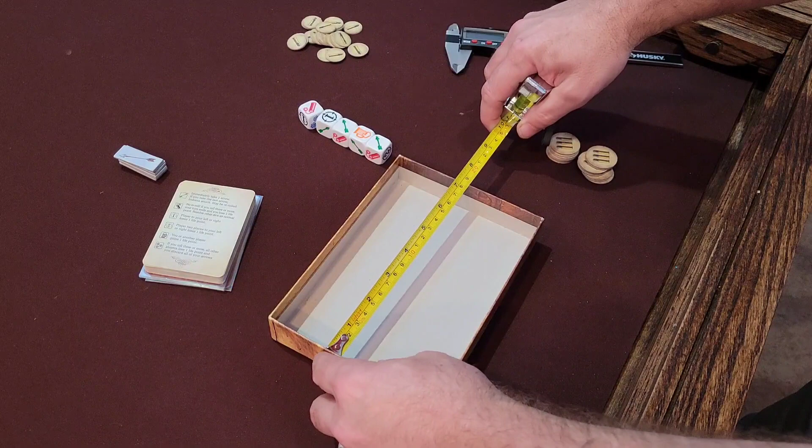So that length is 182 millimeters. I write these things down, and I've already done this. So it's 182 millimeters, and I'd get my width, which is 130 millimeters wide. Honestly, I think it's a little short, maybe 129. I usually err a little on the smaller side, so I might go 128 millimeters on that measurement.

The next thing I do is measure the different components, so I would measure the cards. Let me zero that out. The cards are, kind of a weird angle here with the camera, 66 is what we've got there. And then we've got 93, I think I went to 94 though. And then I'll get the other dimension here, which is 13 or so, 12.6, I think I went to 13. But anyway, so I've got those measurements.

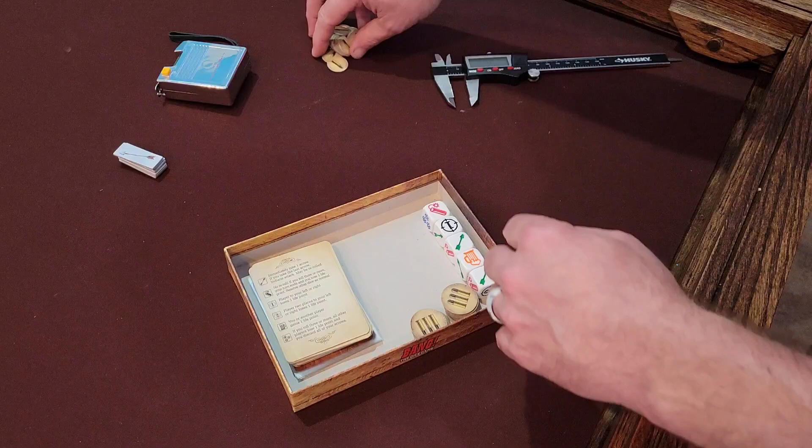Then what I'll do is figure out the orientation I want the components in the box. So I put the cards like that, and I want the dice down here. I know I want to create a little more space if I were to buy the expansion for this game, so these components might be over here. Okay, the other tokens, let's see. You have to just kind of get an approximation of how you might want these to fit in the box.

There's some trial and error for sure when you're doing something like this. I created one for Raiders of Scythia, and when I made it, I almost had it exact, but it wasn't, so I ended up having to modify it and change some things. So the components might fit something like this.

So what I'll do is measure the cards, measure the box. I might also have an insert right here with maybe 3 different pieces, and then I would measure the dice, and write all that down. Then I would put all this into Fusion 360, which would be the next step, to create a physical box in Fusion 360 as well as these components so that I can create an insert. And then from Fusion 360, put it into Lightburn, which would allow me to laser cut the insert. So we'll do that.

Okay, so I'm going to make an insert for Bang the Dice Game, and I'm using Fusion 360. There's a free version available. The very first thing I'm going to do is select Create Sketch. Then you have these different planes you can select, so it doesn't really matter. I'll select that one, it's the top plane looking down.

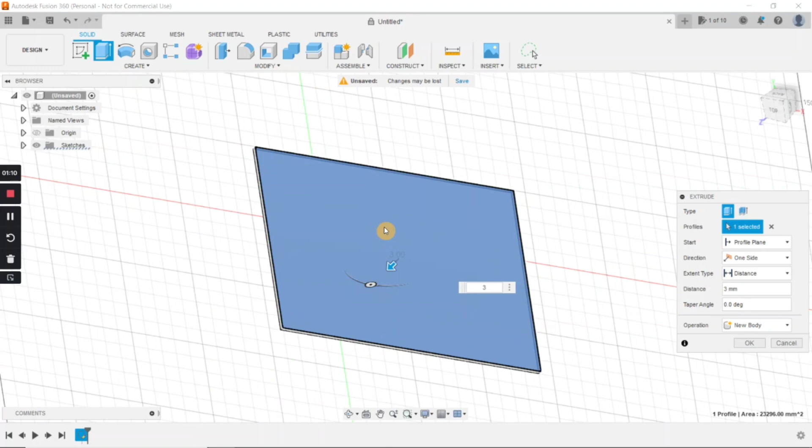Then we'll extrude the sketch, which is what makes it three-dimensional. I know that my box material is 3 millimeters wide, so I'll hit 3 millimeters. If you come over here and select New Component, that's what we want to do, hit OK. So now you can see, if I go over here and hit Home, there's the bottom of my box.

Now to create a side of the box, the way I'm moving this around is hitting Shift and pushing your mouse wheel, which allows you to move the camera view. So now Create Sketch, we're going to create it on this plane, and now I'm going to create another rectangle. We're just going to start it on this corner.

I don't care about that, all I care about is the inside box dimensions. I know my box is 182, then hit Tab, and the walls are 30 millimeters tall on the box, so I'll hit Enter.

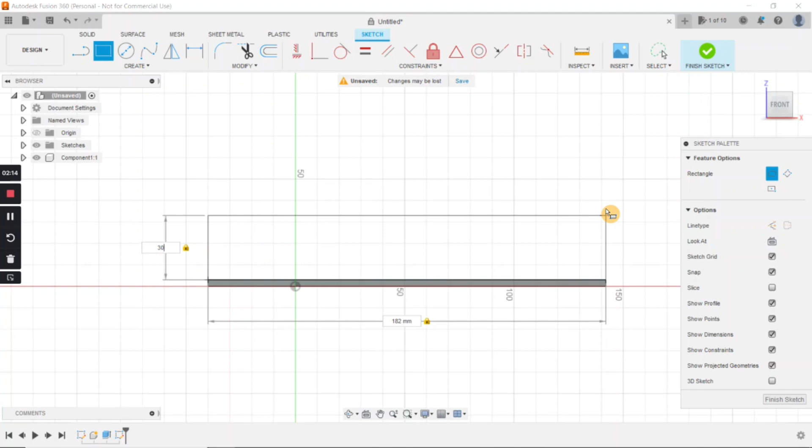Now we'll extrude that. Click extrude... oh wait, sorry, not extrude. You have to escape to get out of that. We have to finish the sketch first.

So finish sketch, then extrude. Select our face to extrude. We'll come over here and click new body, and set it to 3 millimeters. Hit enter. So there. I realize it doesn't go all the way to the bottom, but I don't care. I'm just looking at the inside dimension.

We forgot to select a new body or new component, but that's okay because every time you make something, you create a sketch and a body. You can scroll over that, and what we'll do is right click, create component, and now we have those. So let's rename these.

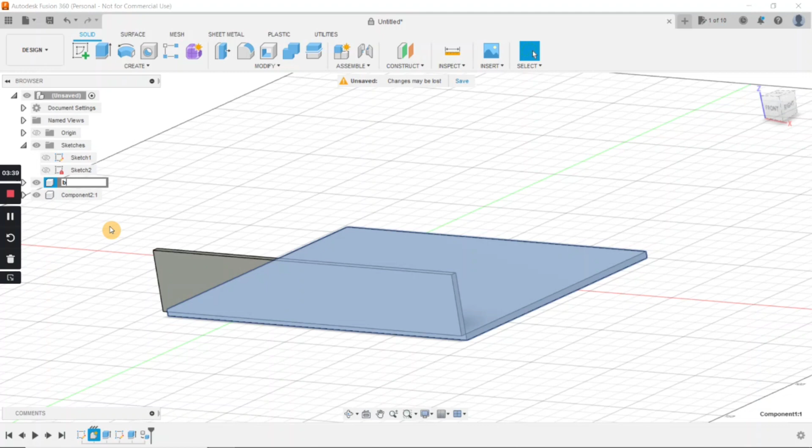Component 1 we'll rename to box bottom. Component 2 we'll rename to box side. And so now we want to make another side.

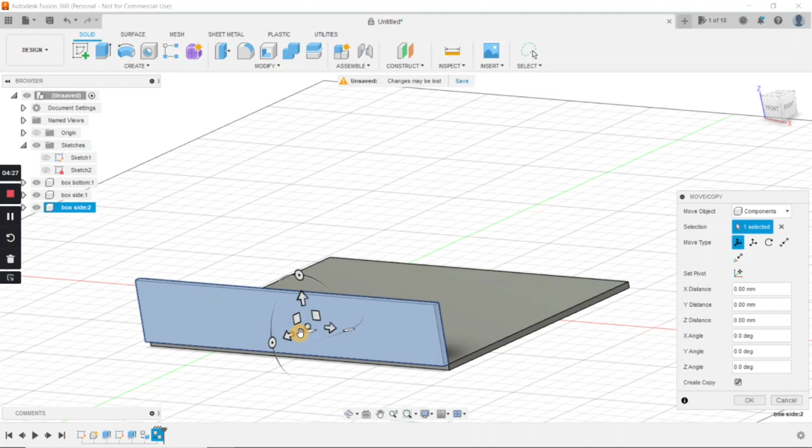An easier way to do this is we'll right click our component and go to move. You can also just hit the hotkey M for move, which is a lot easier. Now we don't want to select a face, we want to select a component, which is what we created. So we'll select this component and create copy, and simply slide this to the other side. Hit enter. You can see it created another component for us.

So we got 3 components there. Now we're going to create another, like the back of the box. Create sketch, and we'll create it off of this plane here, with a rectangle. Again, I only care about the inside dimensions of it. So there we go. And now finish sketch.

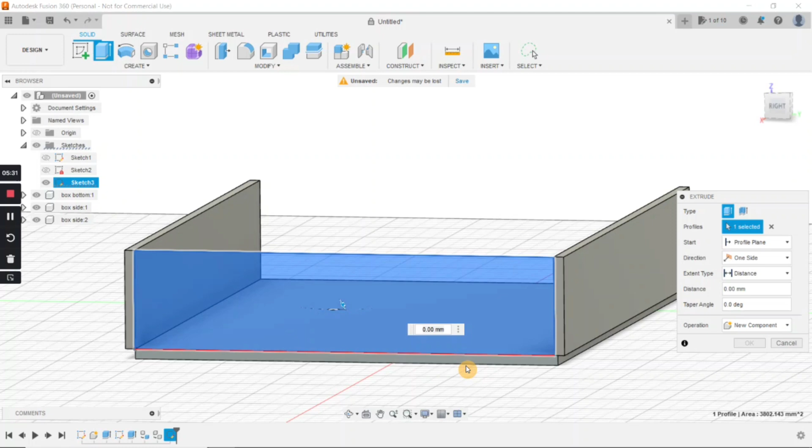And extrude. So click this, and I kind of like looking at it from a 3-dimensional view. Again, we're going to select new component, 3 millimeters, and enter. We'll rename that component box back. Okay, so we got all that squared away.

It's easier, in making these, I found it's just easier to deal with components rather than bodies when moving things around. Now, I'm not going to create another box side because we're going to use this as a reference in sliding our components in and out. It's just a little easier, I thought. You can create another side if you'd like.

So the next thing I'm going to create is the deck box that will go in here to hold the cards. Now we're going to create the deck box. One thing I like to do is create the size of the cards. So what I'll do is create a sketch, and we'll do it on this plane here.

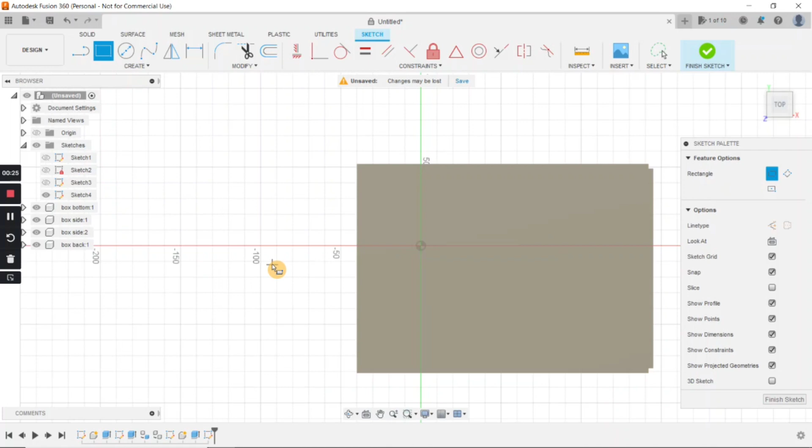I'm going to create a rectangle, and I've already measured out the cards. The size of the cards are 94, and these are sleeved, by 67.

And I'll hit enter. Now we will finish the sketch and extrude the cards to the correct size. I know that the cards are roughly 15 millimeters. And again, I forgot to create a component.

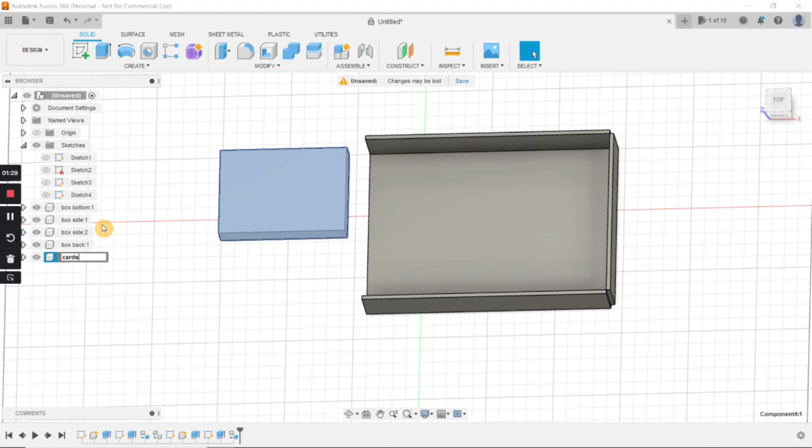So let's go over here to this body and create a component. So here's our component. We'll rename that cards. So that's the size of the cards.

Now we're going to create a deck box around these cards. So what we can do is go to the underside of the cards. We're looking at it from underneath. We're going to create a sketch underneath here. Now I'm just estimating the size. I know I've got plenty of room in the box. If it was tighter, I'd have to really measure it.

So let's just go there. So we got plenty of room for our deck of cards. You know what, let's make it a little bigger. I know. Okay, that looks pretty good. All right, so this is the bottom of our deck of cards.

Now what we're going to do is this is going to be finger jointed because we're going to cut it on a laser cutter. So what we're going to do is create finger joints. Go to a corner - this is our first finger joint. It needs to be 3 millimeters because that's the width of our material. Tab, and for this finger let's just make it 10 millimeters. It's kind of your choice.

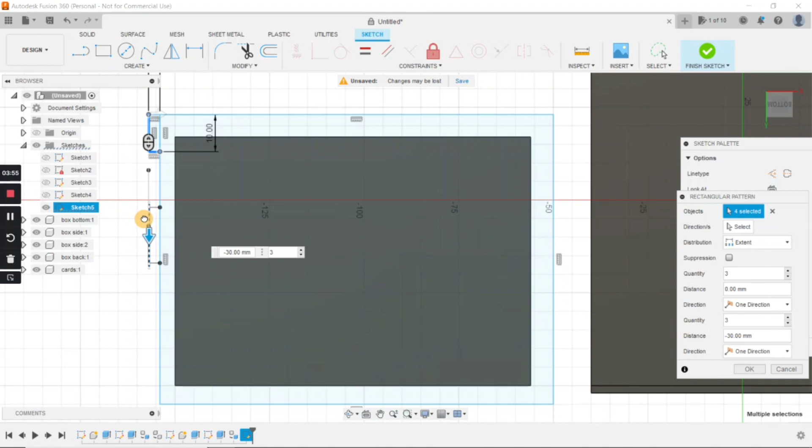Then what we can do is go to create rectangular pattern, and we're going to select all 3 faces here - you don't have to hit shift or anything. Now we're going to drag it down. Oh, I missed one of my faces. Watch this.

There we go, look at that, it added it. Okay, we're going to drag this down to here, and we want it to go to the end. The more you scroll in, the more accurate you can be. Now we want 4 finger joints, and enter. So you can see we have our 4 finger joints.

Now what we can do is the same thing to the other side, but there's a little shortcut. If you select the line tool, we'll find the midpoint. You know the midpoint because see the triangle pop up? That's the midpoint, and this is a reference line, okay, is what it is.

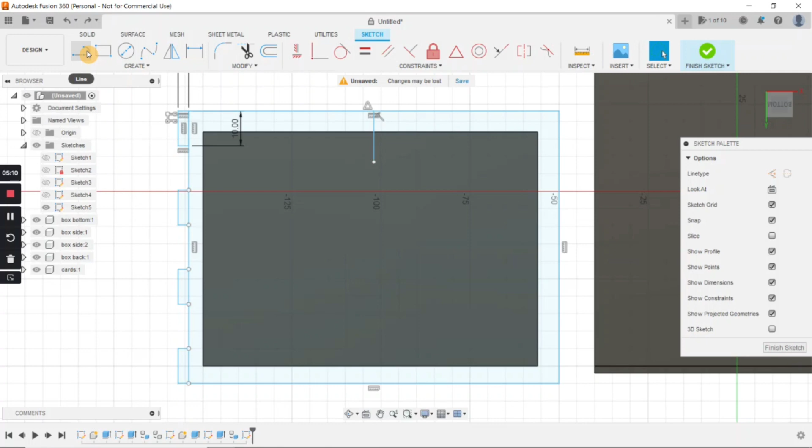So you have to hit escape to get out of that, and we're going to put another reference line here. See the triangle? We know that's the middle. Reference line, that is angled. So Control Z, line tool. There we go. Now what we can do is click mirror.

We're going to select—oh, I don't like that select tool. Let's go to the window selection. Okay, and we're going to select all of these. And it still didn't get everything. That's okay, you can go one by one, not a big deal.

I am not an expert at Fusion 360 by any means, and I'm sure there's easier ways to do all of this. So okay, we've got the selection. Now we click mirror line, and we mirror this line, and pow, they just pop up on the other side, and click enter. So there we go.

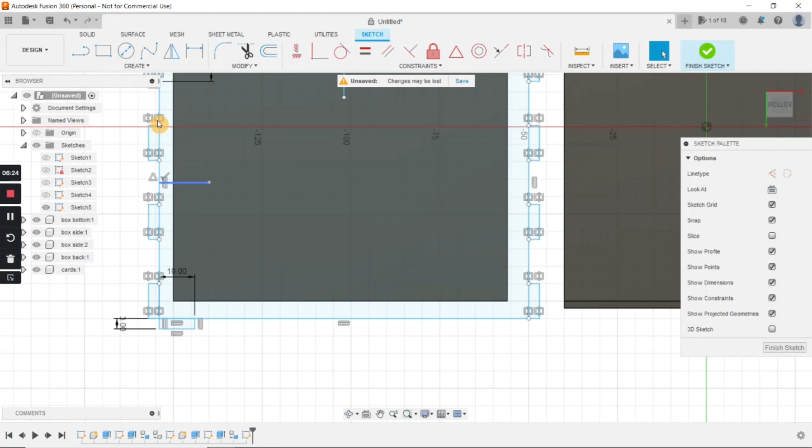Now we do the same thing to the other side. Finger joint, so let's do 10 millimeters that way again. Tab, 3 millimeters, enter. Rectangular pattern. Select all 3 faces, and then we will drag it out that way. And we want 4 tabs. Enter. And then we're going to do the same mirror trick for the other side.

So click mirror. Can never get it to select everything—I don't know what I'm doing wrong. It's okay. There we go. Mirror line, select, and we'll mirror across this line. There they are, and enter.

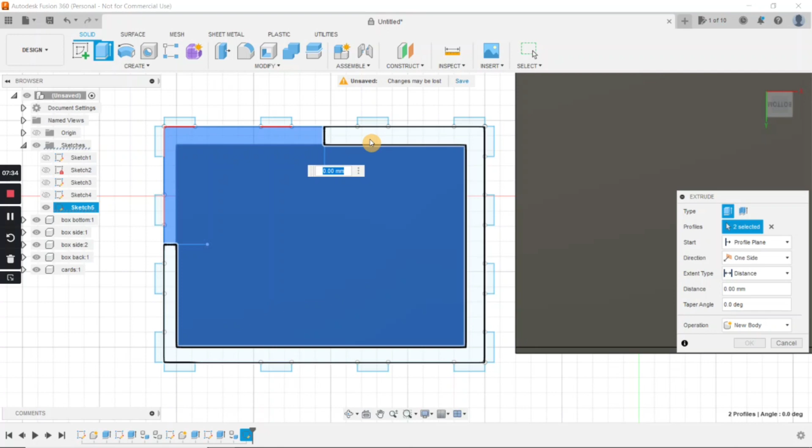So now what we can do is finish this whole sketch out. So we'll click Finish Sketch, and now we're going to extrude, so we're going to make that whole piece 3-dimensional, and you have to click everything. For whatever reason these lines kind of separated out, that's okay. And then click your tabs.

Okay, and now I'm going to look at it from a 3-dimensional aspect. Now, our material width is 3 millimeters because that's the wood I'm using—the wood is 3 millimeters wide. So what we want to do is again create a new component, enter, and let's look at it. Let's go home, and you can see what the bottom of our card holder looks like. We're going to rename that. Card insert bottom, okay.

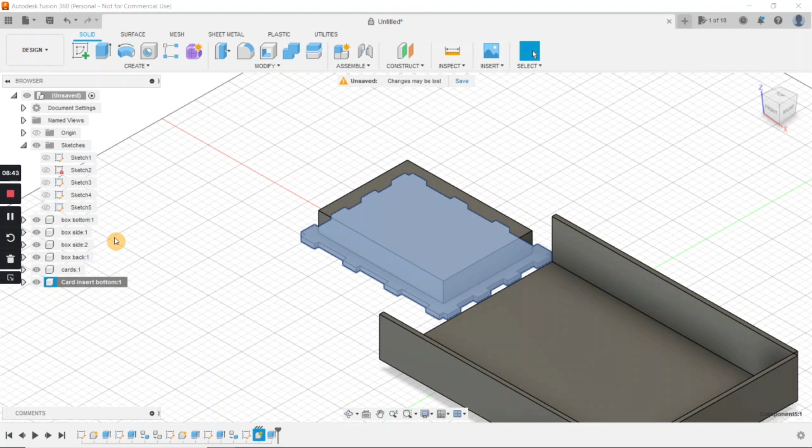And now we're going to create the sides for it. The way we'll do that is, let's bring it over here, and create sketch. We're going to create it on this back part, okay, on the side. And rectangle, and we'll go all the way here. Let's minimize that, we can see a little better. And so the height—well, the width's going to be all the way down here, okay.

110, we're going to tab, and the height—the inside diameter or the inside height of the box is 30 millimeters. You know, we could go, let's say 25 millimeters high, and then if I buy one of the expansions or whatever, it's got enough room for more cards. So we'll hit enter.

And then we'll do, you can kind of see this, and we'll extrude this, finish this sketch, extrude. So click this, and we'll do new component. It's going to be 3 millimeters.

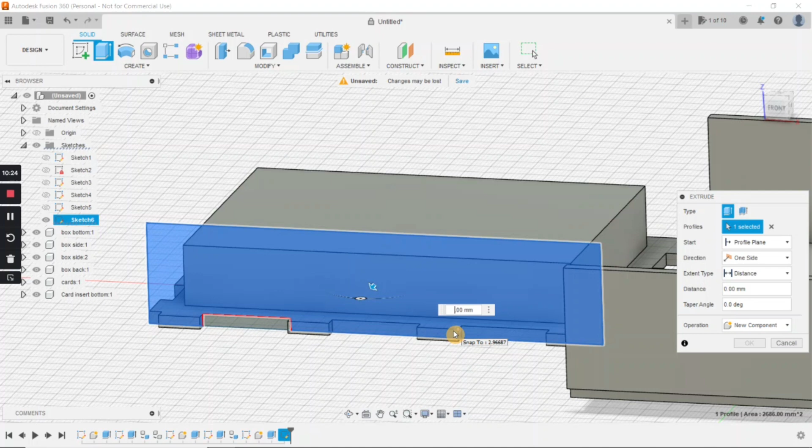Just like that, okay. Now, for whatever reason, you can kind of see sometimes this happens where it didn't extrude correctly. And that's okay, because what we can do is extrude, and we'll select that face and just pull it down. You can see over here it's got operation join, and so it will join these two. So there we go.

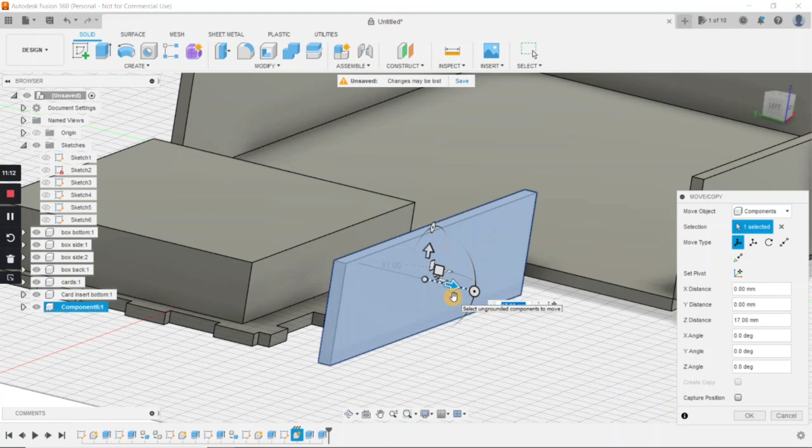Okay, now an interesting thing to note is that if I move this—I'll just click in to move and select this—if I move it out, you notice our finger joints are not cut. Hit Control Z to bring it back. And so to cut these out, what I can do is select Combine. I'll select the face here, and then the tool body, I'll select the bottom.

Now, the operation has to be on cut. If it's on join, it'll join the two together. Cut, though, will cut these out. And you want to keep the tool body. So I'll hit OK, and now let's click in for move.

Having all kinds of trouble here. There we go. So see, our finger joints are cut out. Now we can just put this where we need it. Looks like we cut a little on that side. That's okay.

All right, so now what we can do is copy this to over here, just like we did on the other part. Push in and select component. No, wrong component.

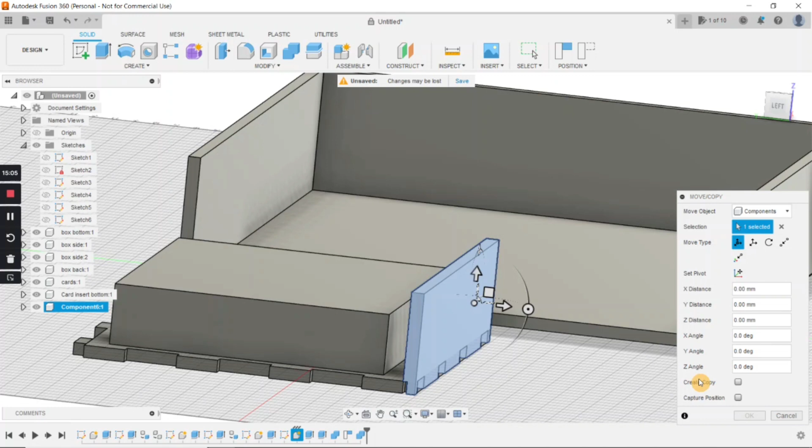Okay, and we're going to create a copy, and we'll move our copy right over here. There we go, hit enter. You can see it made our, we're going to rename these to card side. But let's say card back, because that's really the back. Name card front. You can name them whatever you want. Okay.

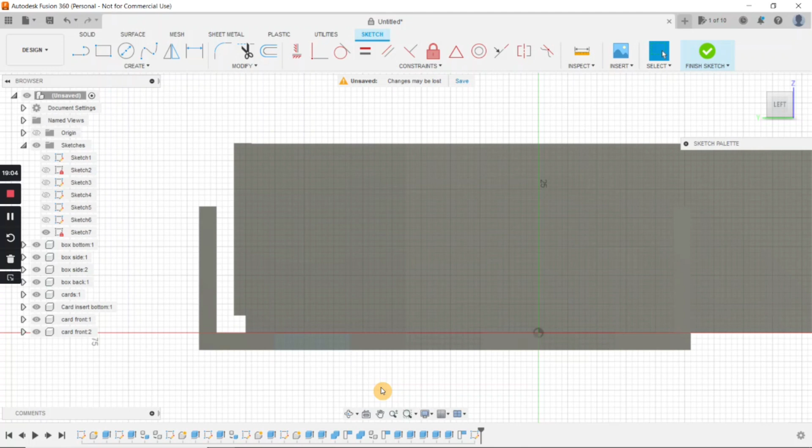Okay, now what we have to do is create sides to this. So create sketch, create it on this face right here. And rectangle, and it's got to go all the way through to this edge here. Okay.

And then what we'll do, actually no, let me scratch that. Actually, is to go from this edge. Make sure, let me look at it. Yep, that's correct. To this edge right here. Okay, we'll hit enter.

And now we're going to create finger joints on this side. So again, 3 millimeters, tab, and we'll do these, how about 8? It's a little large. Let's do 5. Enter.

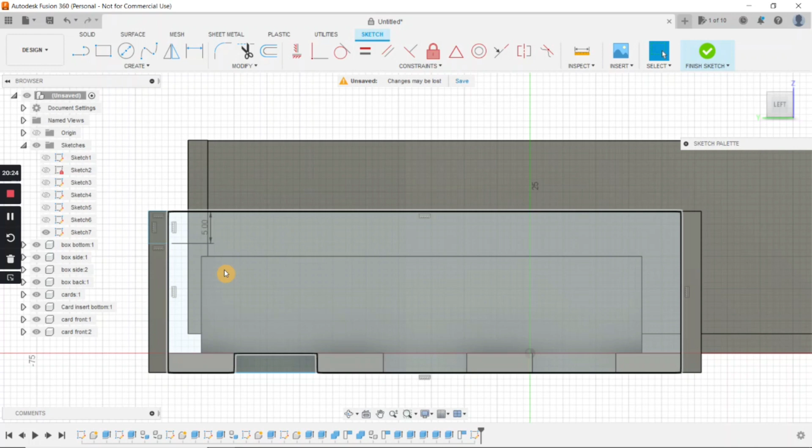And create rectangle pattern. 1, 2, 3. Slide these down to there. And we'll keep it at 3. Oh, wait, I went too far. It's kind of hard to see. 1, 2, 3.

That looks correct. Enter. Now we'll do our mirror trick. Our line here, escape to get out. Mirror, 1, 2, 3, 4, 5, 6. Okay, and select your mirror line, just here. And okay, and look, there they are.

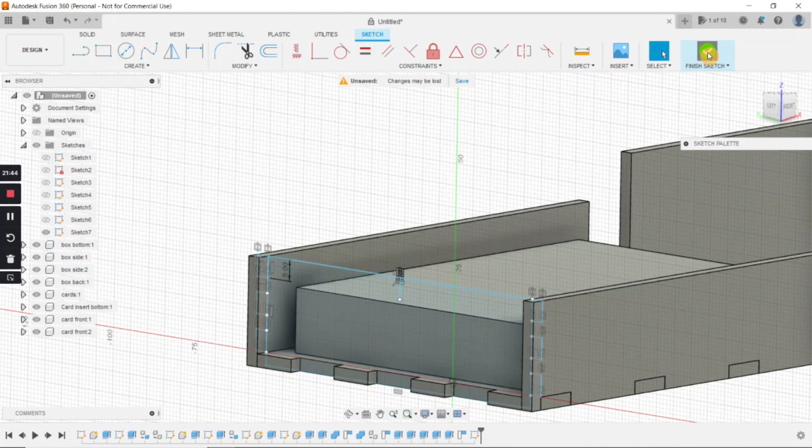Now, we'll look at this from this angle, and so we need to extrude this outward. Finish sketch, extrude, and we'll click all of the faces that are going to be extruded. Okay, and 3 millimeters, and selected cut. We don't want that. We want a new component. Click OK. Here we are.

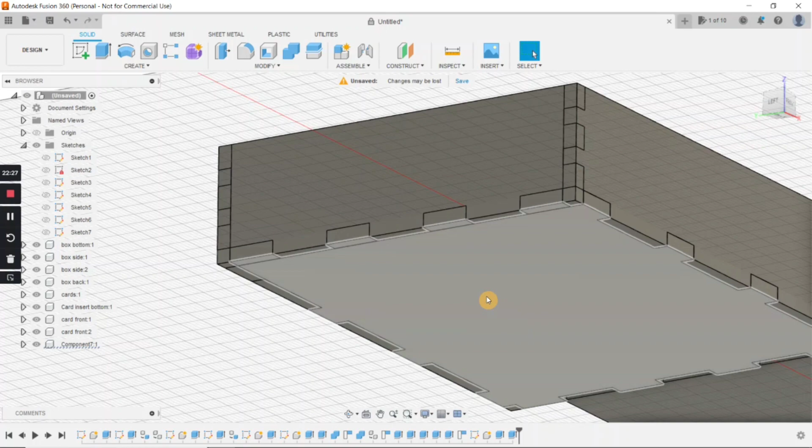So again, we had a face not really behave. So what we can do is click E, and extrude this down, and we want join, and hit OK. Okay, so now we have to make these cuts.

So I moved my deck box out of there. Just use the move function. So we'll click this one, and this one, hit OK. Now for the other side, this one, hit OK. And I can't remember if I did the bottom or not, but the bottom one, this one, OK.

Now let's make sure we did our cuts. And let's move it out. And look at that, perfect. Awesome. Control Z to go back. Now what I can do is we're going to move this over here.

Now also let's rename that component so we know what it is. Card back. Or we'll just say card side. Got my names all mixed up. That's okay, because you can always scroll over them and see that really wasn't the front. Those were the sides, but that's okay.

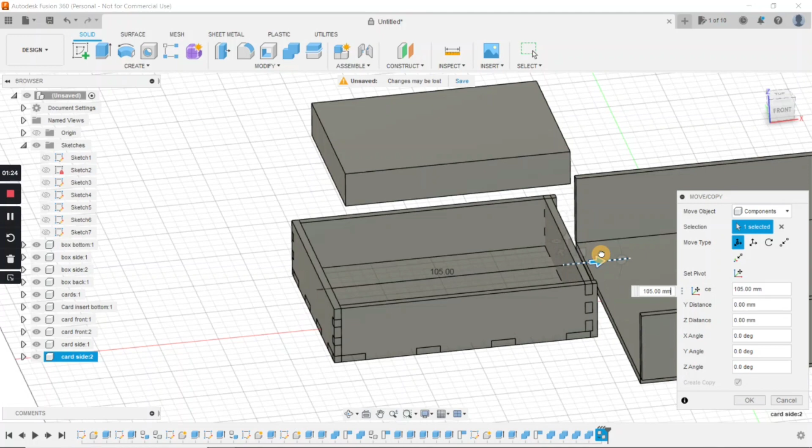So now what we'll do is create copy. I'm going to move this across. And it's not squaring up, but if you scroll in, like I said, the more you scroll in, the more accurate your moves become. There we go.

Now we have to make these cuts. So there, and there. Okay, again, there. Okay, here, bottom, side. Okay. I always like to check it. So let's move that, and look at that. All of our cuts are made.

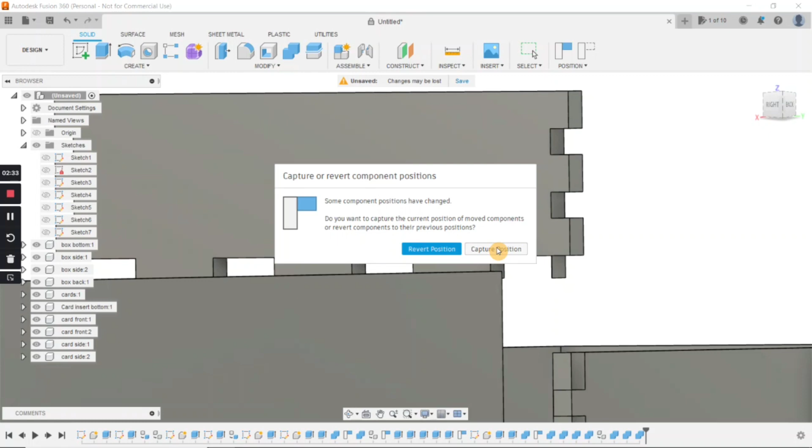Looks like something's a little funky over here. Oh, that's definitely funky. Let's get in the right orientation here. So there. I don't know why we got this little hanger on, but what I can do is extrude. So we'll click that. Now I'll go the opposite way. That'll cut it out. That's gone.

Okay, and then what I'll do, I see they've all got that. Well, what we can do, and so see this box here? I can get this out of the way. It's getting kind of be a pain. So I can click these little eyeballs and it will get rid of that. That's why it's so handy to label these. And so let's get rid of this.

So we'll hit E for extrude on all of that, and we can go back to cut it. Let's just go 0.1. What I can do is two sides, click that side, and go 0.1, so I don't eat into my finger joints. There we go, and because that was a copy, it did it on both sides. Now let's put this back in place.

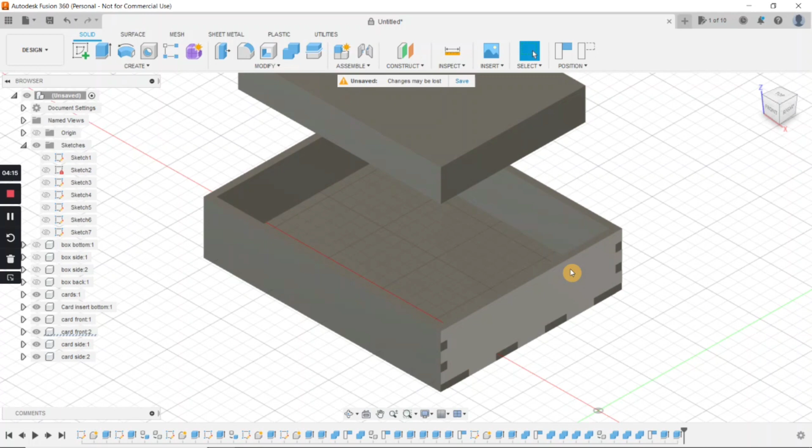So we'll go down. Does that look like that's in place? And there's our card box. Now let's make a little cut somewhere where we can get our cards out.

So what I'll do is create a sketch. There, yeah, there was a much easier way to do this, but that's okay because I'm learning this, and I guess you're learning it with me. So finish sketch. There we go. Now we'll extrude. Cut back—really just 3 is all we need, but that did it.

Okay, so that did what I needed it to do. And now we have a card box that... that's fine, I think that'll work fine. If it doesn't, we can modify it, because it's attached here and it's attached down there.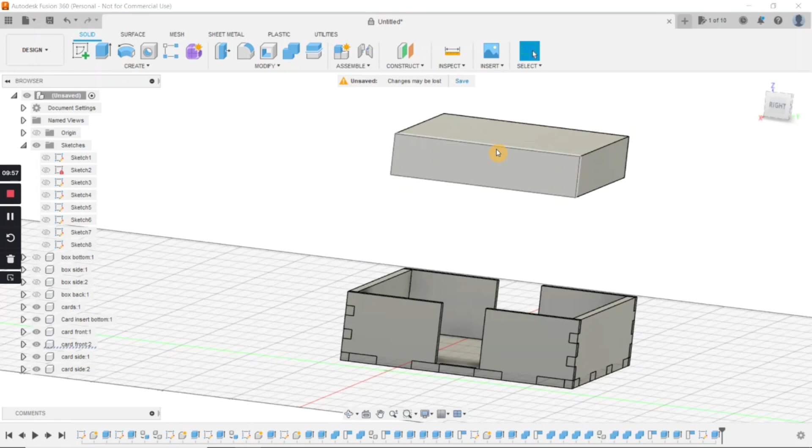And we'll see if we can move it into our game box. So let's move—let's see, you got everything here? Yeah, so let's move this back down, and move it back down. We're good, so there's our cards in our box.

Okay, let's make our—interesting, because this is a copy of that, it cut in the back there too. That's okay. So now we will make our box visible again.

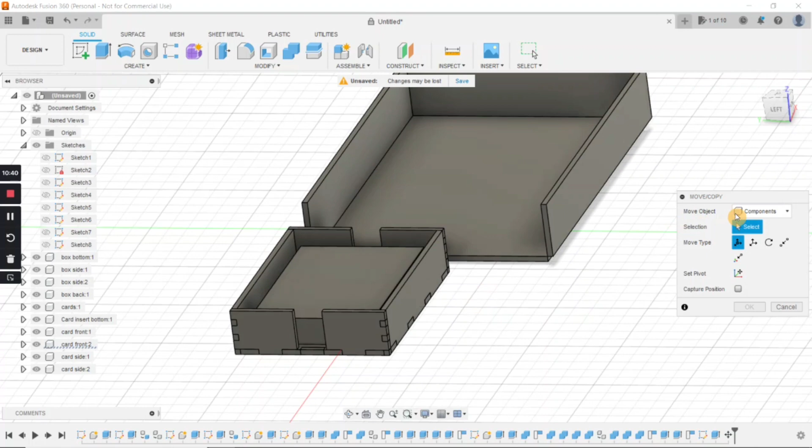And let's rotate this around. That's a little lower than the level of the box. That's okay. So now we're going to move and select components—we're going to select all that, so you can hit Shift. This is when dealing with components is a lot easier. Okay, actually that needs to be 3.

And then we're going to slide it in. One thing I want to do is rotate it. Okay, so I want it to fit in this way. Let's look at it from the top. And we're going to move it all the way this way, and move it that way. Look at that.

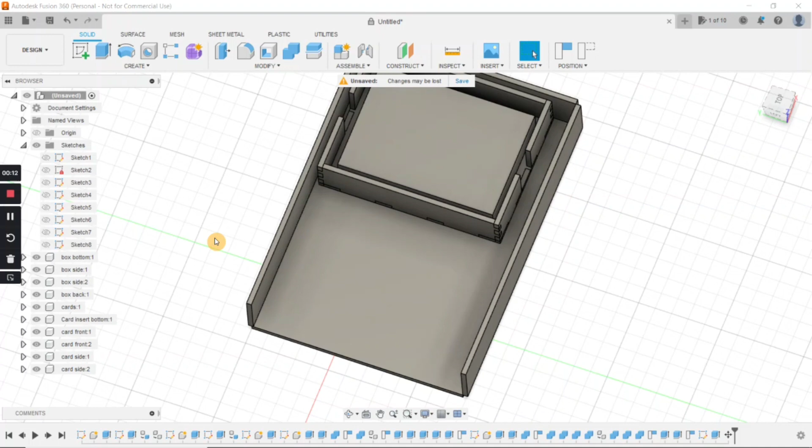Okay, so next I'm going to create the token tray, and it's going to go right here. I've measured all my tokens. I'm not going to actually create the tokens physically in Fusion 360—sometimes I feel the need to do that, sometimes I don't. So what we're going to do is create a sketch, and I'm going to actually create it right here in the box itself. Why not?

Let's capture that position. Okay, so now what I'm going to do is start with the rectangle, of course. I know that I need at least 65 millimeters width, so I'm going to go really close to this one, get as much space as I can. So we're going to go 65, tab.

And let's bring it down here as close as we can also to the other side. Okay, well right there. So we know it's okay, we're in the confines of our box.

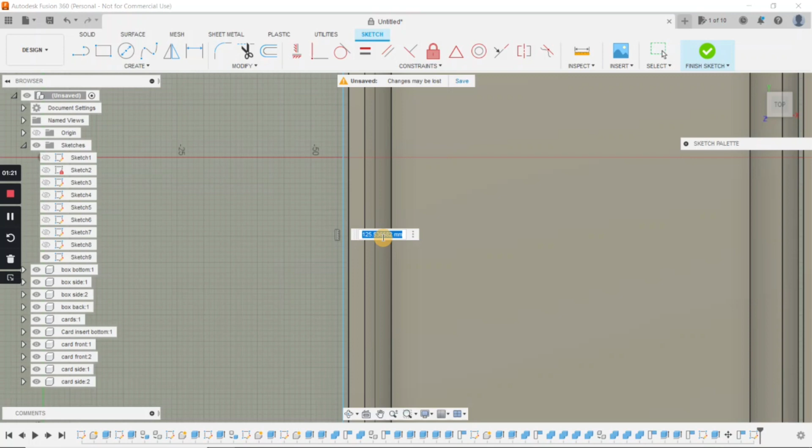Let's kind of just make this an even number. I wonder if we can get away with 126. Let's see if we can—go look at our edge. It is literally right on the edge, but I do believe we have a little bit of play over here. We do, so that's fine.

All right, so this is going to be our token box, and then this is going to be the bottom. So let me see here—what we're going to do is do this a little different than the deck box. You know, on the bottom here we made all the tabs, right? Well, we're going to do it a little different here because we want this exact measurement. So we're going to finish that sketch.

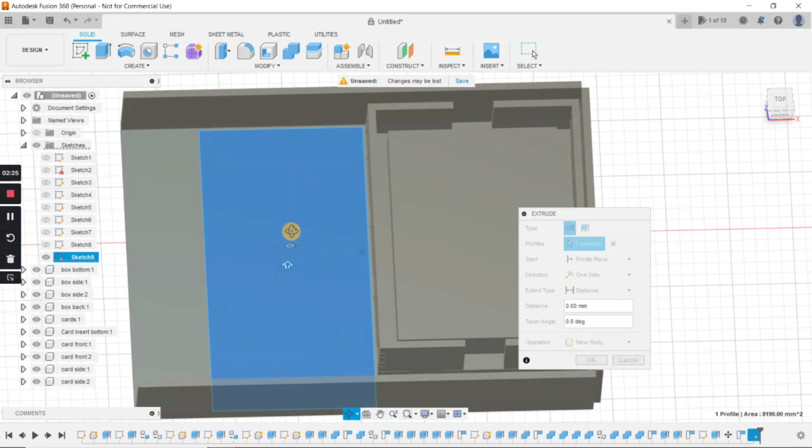And extrude. We're going to have to go up—let's just look at it a little three-dimensional—and 3 millimeters up. We don't want to join; if we do that, it'll make it part of the rest of the box. So we want a new component. Hit OK, and let's name that component token bottom. Okay, let's do this.

Okay, now what I can do here, to give us a little cleaner look, is we can get rid of all these other views of everything. Okay, and that way we just have this. And so now what we're going to do is create another sketch.

And we're going to create our sides and our dividers. So create a sketch, do it on this side, and we're going to create another rectangle. Let's do this different—we're going to start here because our tabs are going to have to extend downward. So 126 by—we can still do the 25 here. Yeah.

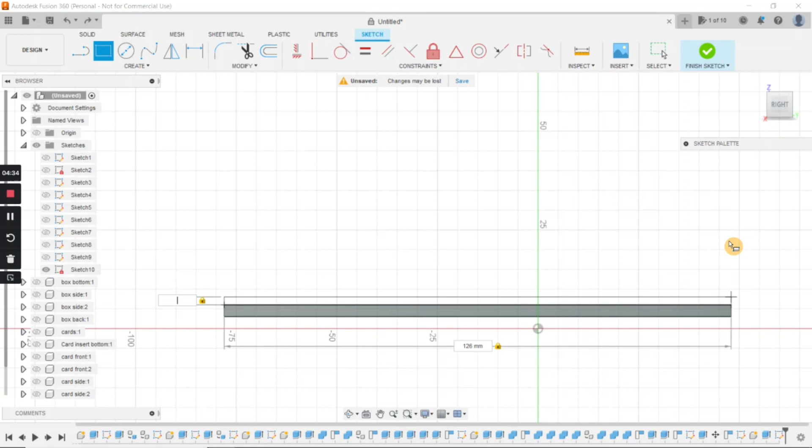Actually, let's do 24. Okay, there. Now we're going to create our tabs down here. Let's make them 8 by 3. Okay, and you know what, this is a longer box, let's make this 10.

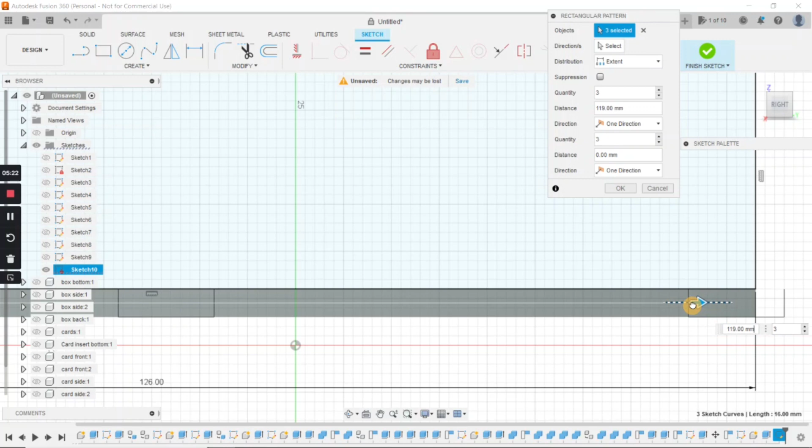Now we're going to create our rectangle pattern. Okay, get this out of the way. All the way across, and let's stop it at the end. There we go, and let's do 4. That looks good.

And so now that has extended down into our base. So now what we'll do is finish sketch, so we can kind of see how that's going to look.

Now we're going to want to extend it inward, right? So extrude there, there, there, there, there. And you see it's going the wrong way, so we need to go direction 2 sides, we can select the other side. We need to go 3 millimeters in, and it's wanting to just cut it. We don't want that, we want a new component, and hit OK.

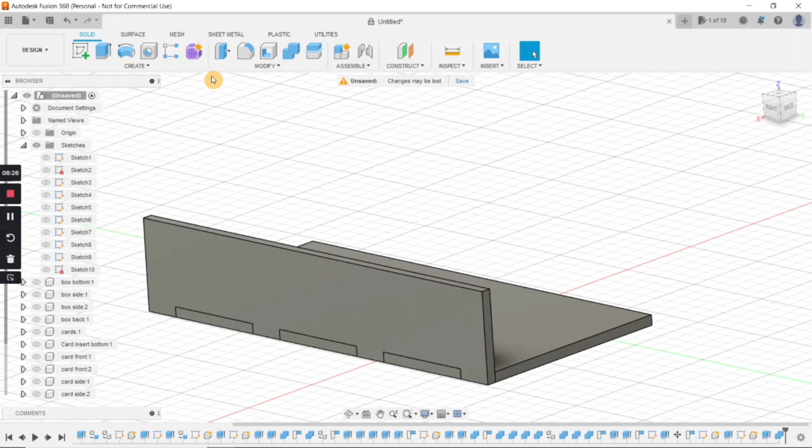Now, the part I have so much trouble with is combining the two. We should be able to just do this, and OK. And I'm paranoid, I always want to check and make sure I made the cut correct. And it did, okay, good.

Now what we can do is copy this and move it over. So we'll click M for move. Component, yep. Select that. Yep, okay, Control Z - so what I did, I forgot to hit copy. Copy. Move it over. And it's not wanting to go where I want it, so let's zoom it in.

There we go, Enter. And then we need to make our cuts here. There, there, okay. Move, looks good. Control Z. All right, good.

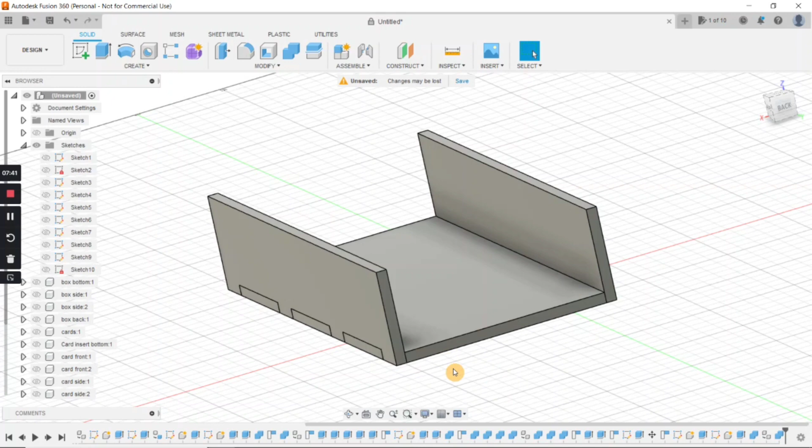And so now we need to create our ends. Now when we create the ends, we're going to have to do them to the inside - if you notice, I'm sorry, no, to the outside and push them in. So, create a sketch, rectangle, and again we have to kind of go to the outside. Sorry, I was correct the first time, to the inside, and create our tabs.

So here we go, awesome. Enter, so now we're going to create tabs all the way around, so 3 millimeters by - this is smaller, so let's just stick with the 5. We'll go ahead and create our construction line there, or our reference line, and use a mirror.

Oh no, not mirror, I'm sorry - rectangle pattern, getting ahead of myself. Pull this down. And we'll keep it at 3 tabs. Enter, then mirror.

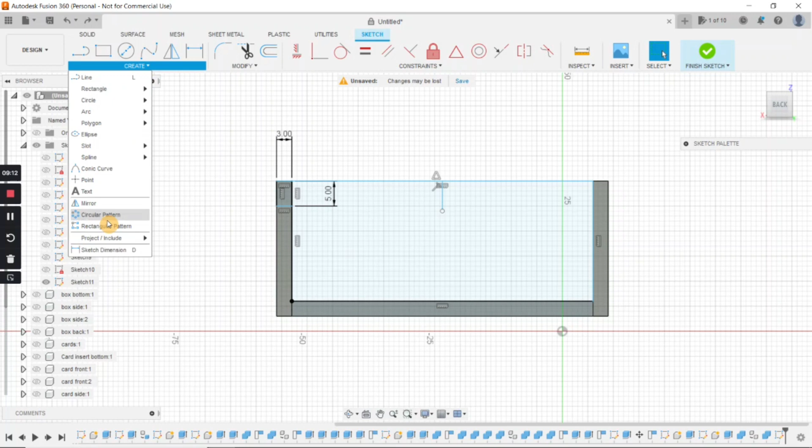No, went down too far. I swear I had it right. It's not... okay, there. Now mirror. And our mirror line. Got it, okay, looks good.

Now we have to create tabs on the bottom. And 3 by 5, looks good. Rectangle pattern, all the way across, and we want 4 tabs. Looks good.

Now we'll finish the sketch. I always like moving it to where I can see it better. So we have to push it in, and so we'll extrude. No, I don't want that, I don't want that one selected - that one. Let's extrude this again.

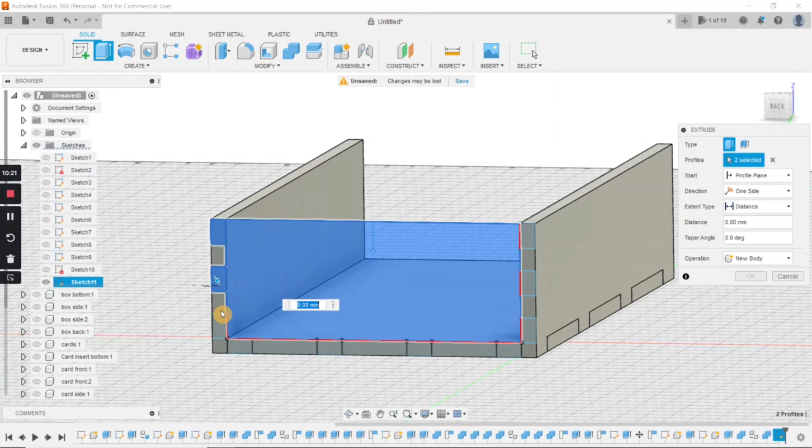I'm not sure what I did, honestly - extruded way too far is what it looked like. Okay, now 3 millimeters. Oh, I know what I did - did I go the wrong way with it? Probably. 3 millimeters in. New component. Okay.

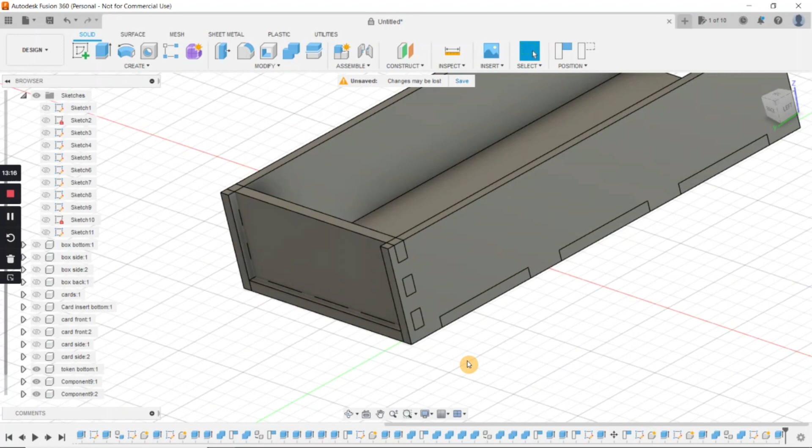Okay, I see, I think I need to move it in. A little too far. There we go, all right. Now let's make our cuts. Okay, I just want to check it, make sure it did it correctly. Yes, okay, there.

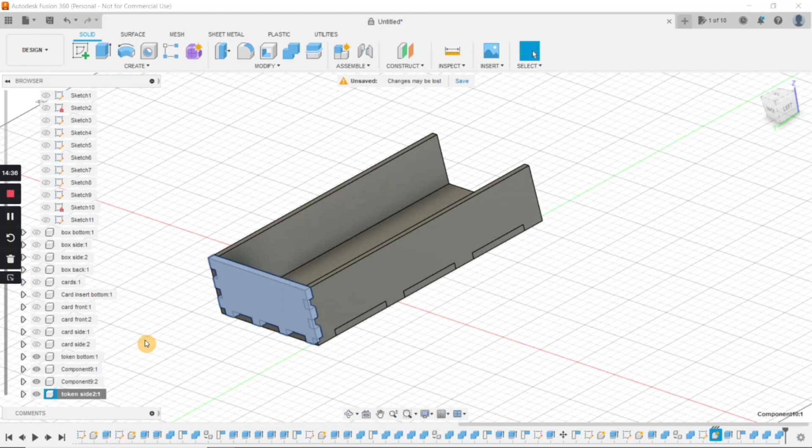Now let's rename our components. And I forgot to name that one, didn't I? Or did I? Component, okay, that's it. Okay. Token side 2, token side 1.

Okay, now we're good. So now we can copy that and move it, and so we want components. Select this, create copy, and move it across. Looks good. Let's get it in the place we want it though. Okay, let's make the cuts here.

I'm sure there's a more efficient way of doing this for someone who really knows what they're doing, but this seems to work because I've actually made some inserts. Okay, so now what I want to do - okay, so I've measured this, and what I'm going to do is we're going to create some compartments.

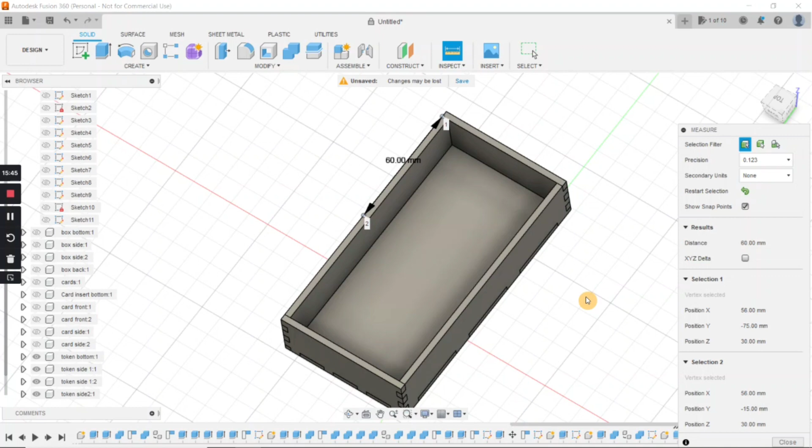And so remove this, create a copy, and we moved that 30. And I need about 25 millimeters for the tokens, the arrow tokens. So that is from that wall to that wall, and so that's a 3 millimeter wall, so that's 27 millimeters. So really it needs to go, let's see.

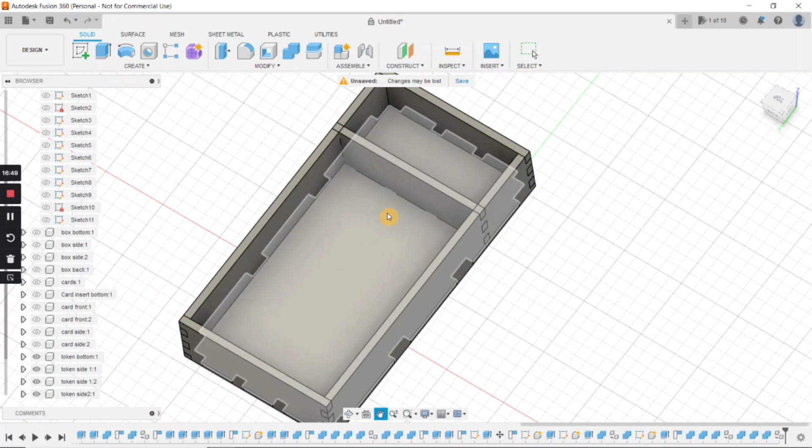That's 28 millimeters, which gives us a 25 millimeter gap for my arrow tokens. Now I need to move it again and copy, but let's just go ahead and cut our holes. Just want to check it and make sure... yep, it's perfect.

Now we're going to move it and create a copy. Let's see, that should be plenty large for my single bullet tokens, and this would be the area for the large bullet tokens. Let me just check the size there.

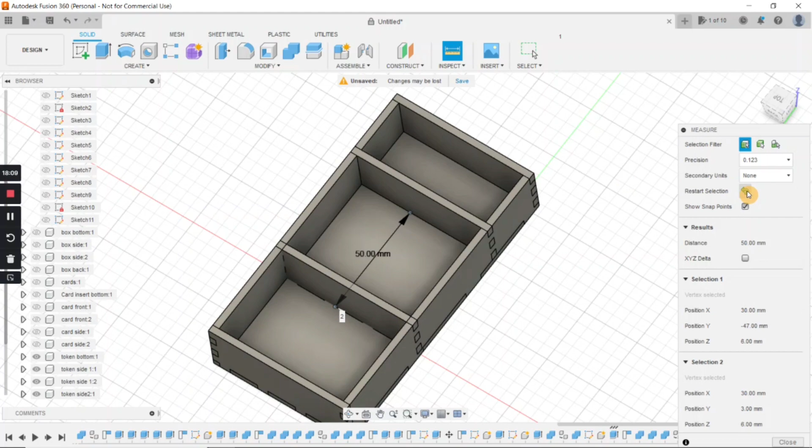So we're going to measure from here to here, 50. Yeah, I need at least 45 on that. We'll reset that and measure again from there to there - 42. Yeah, that's plenty of room.

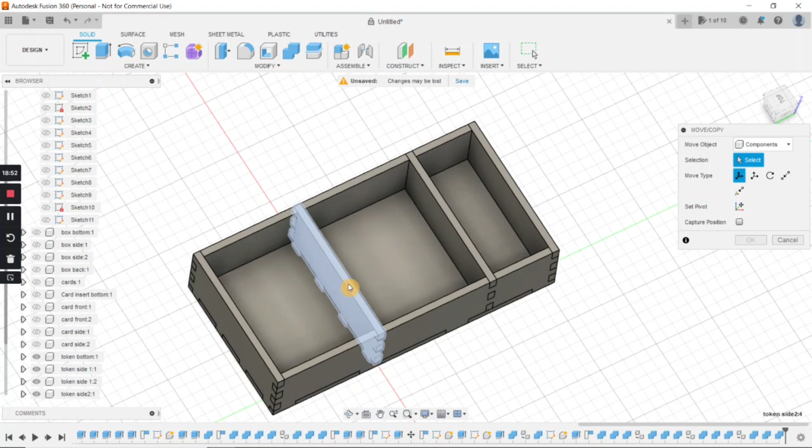Okay, so now we need to make our cuts here. I'm going to check it, and all that looks good. So this is my token holder. What we can do is stick it back in the box to see how it fits. Look at that - perfect.

So far we have our card holder, now we have our token holder. Next, I'm going to create the little insert to hold the dice.

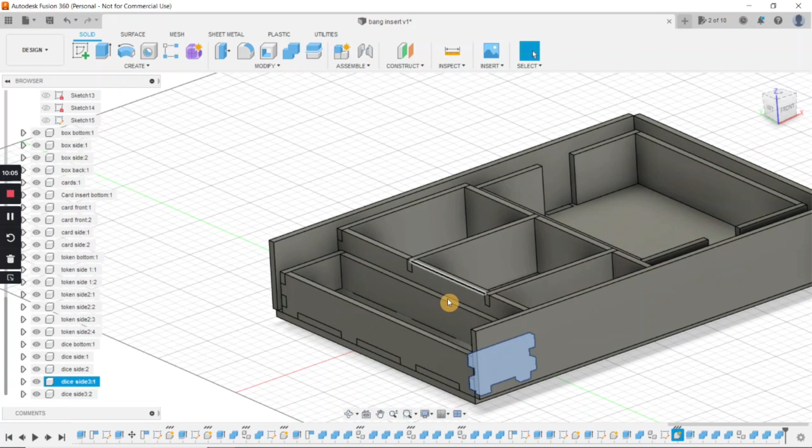All right, so just to show this slight fix, I'd really like the dice box to be longer. So the way I'm going to have to do that, number one, is get rid of some of this other stuff so I can work on it.

All right, now what I can do is first move some parts out of the way. This can stay the same - I actually should have measured it to see how many millimeters more I wanted to go, but I did not. So I'm going to have to extend these two pieces.

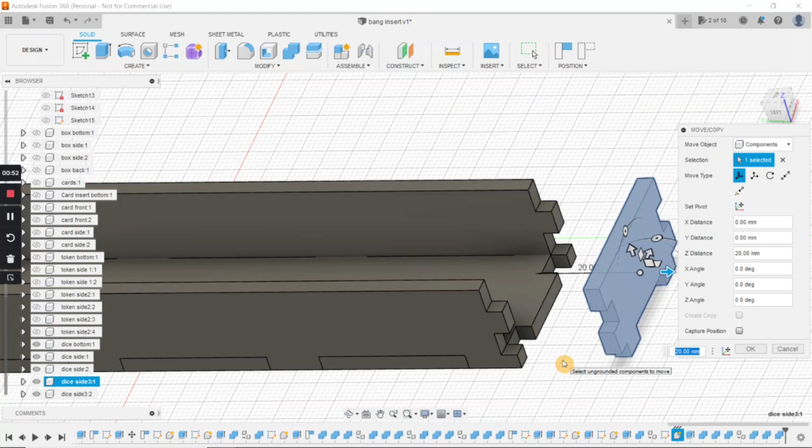The way I can do that, let's see, is to extrude this end. Okay, so I got to pay attention, let's go 2 more millimeters. Then I got to do the same with this, and same with this. I'm just hitting E for extrude.

Same thing with all of these faces also, and this - extrude. I can even get rid of that one for a minute... where's that one? There it is. E, extrude.

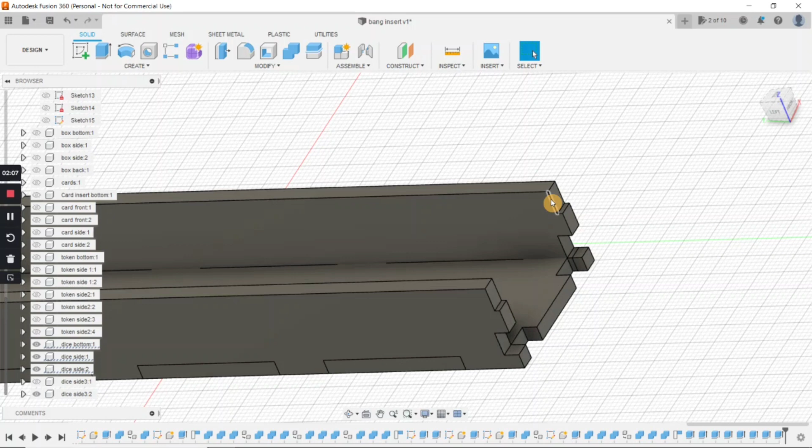It's a little time consuming, but it works. I'm sure there's better ways of doing this. Let's see, did I do all that correctly? Looks right.

So now I can put the end cap back on. Let me pop that back and move it to see if it fits fine. Looks like something's a little off there, yeah - I didn't extrude that one quite enough. There we go, alright, so we just extended the end.

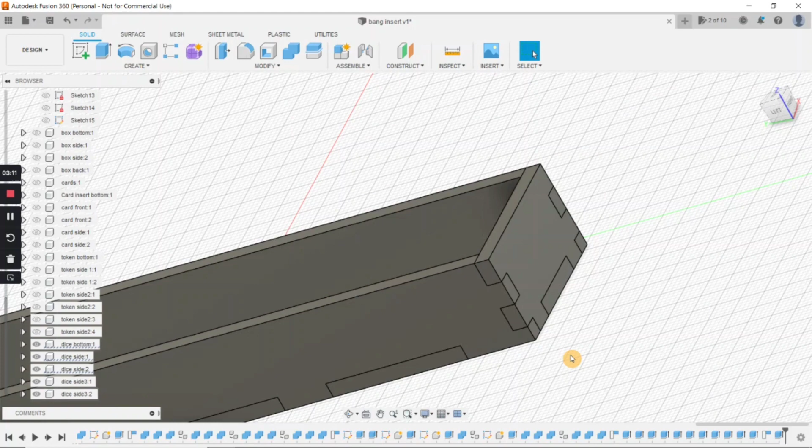Now let's put it all back in place and see how it fits. Ooh, is it too much? Yeah, I think I went a little too far. Look at this from the straight-on view. Yeah, too far - so I'm going to have to go back about 1 millimeter.

Oh dang it, I'm making it all visible. Okay, so we'll just do the opposite of what we just did, and go back about 1 millimeter on everything. I'll fast forward, pause that, and do that.

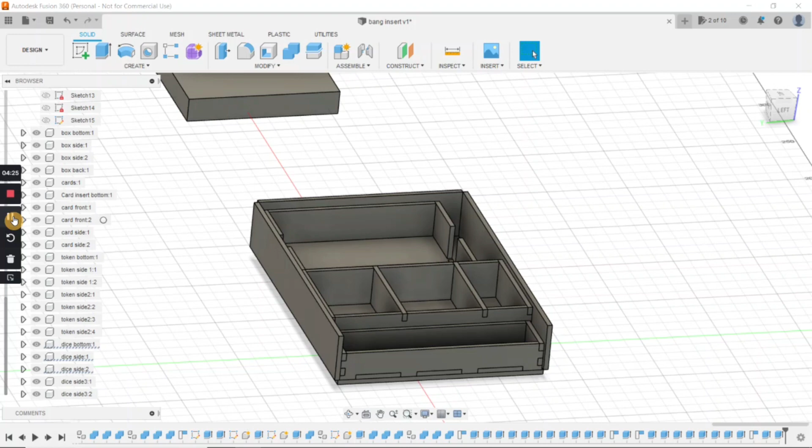Okay, so here's the final insert, and it's ready to go. Now we got to get it ready for Lightburn.

So I got rid of the box part, and now we're going to have to move some pieces out of the way. Actually, not that one, but that one - there we go. So we're going to move that aside.

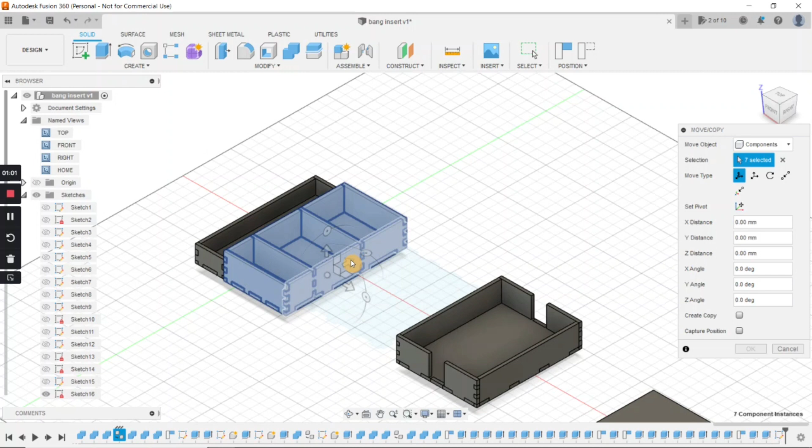Okay, then let's move this one. Didn't get it all... there we go. Okay, so then we'll move this one - I think I just grab it all like this. Move it over here. Now what I have to do is lay these pieces flat.

So let's do this one first. Hit M, click this, and now we'll turn it 90 degrees. Enter. I should have done that because it has to be moved away a bit. Okay, and move, M.

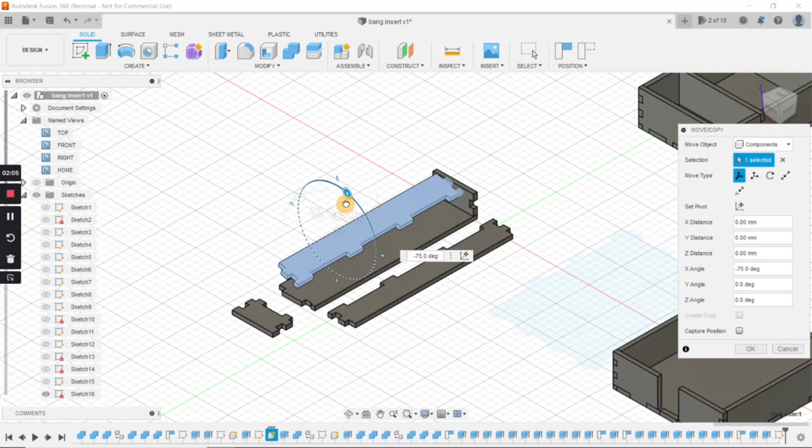90. Move it away. I wish I knew a way to just lay it down completely flat, because it's hard to tell here exactly what's flat. I'm sure there's a way, and I just don't know it. Move it out and down. Again, I wish I could just hit a key to drop it to the ground. If anyone knows of a way to do that, let me know.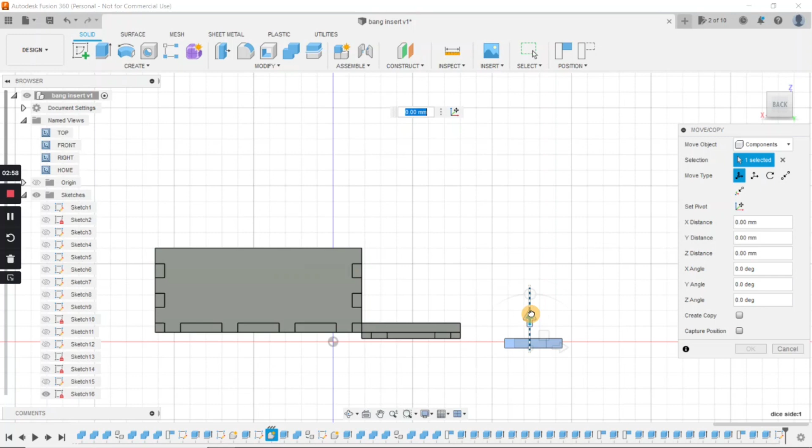So rotate this 90. Move it out. It's pretty close, but a good way to know for sure is, let's look at it from a level perspective, and obviously they're not level at all. So you want them fairly level with each other. Sometimes they don't want to really do that.

This part's a little time consuming. What I'm going to do is pause the video and do the other pieces that way. Okay, so you can see I've laid all the pieces flat, and now we can look at it from the top, and we have to do what's called creating a projection.

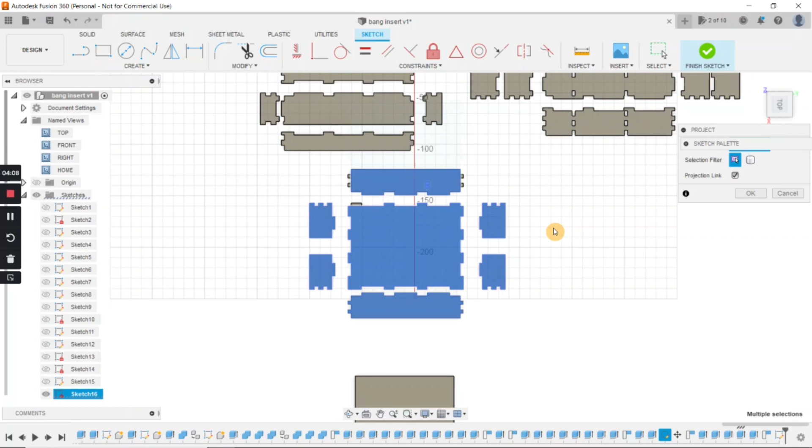That's what we have to do. So what you do is press P, and you have to select a plane, which I did. So we'll do the card tray first. What you can do is click, hit Shift to click every piece. This is going to create a projection of the card box. You have to make sure every little piece is selected, or it will not work. Well, evidently it's selected.

So specific entities is clicked, and projection link is clicked. Hit OK. You can see it's highlighted it all in purple. Now what it's done is created another sketch. Sketch 17, and we can rename that projection.

Card box. Now what you can do is right click that, save as DXF, and we'll go to my Lightburn folder and save this as Bang the Dice Game Card Box. Save that.

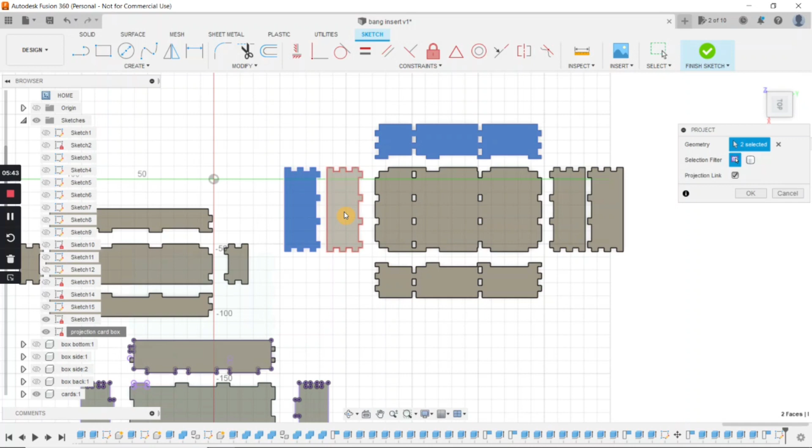So then do the same thing, hit P. And then we select our geometry, hit Shift, click all the pieces just like before. Hit OK. You can see it's all outlined in purple, and you can see it's sketch 16 because you can scroll over. No, it's not sketch 16. Okay, so when I saved it, I must have just saved them both together as projection card box, because I highlight that, they both pop up.

Okay, so then we have to do the dice tray. So hit P, and hit Shift and select each component, and OK. Then you can see it made sketch 18. So we'll rename that as projection dice box. Okay, and we'll save that as a DXF.

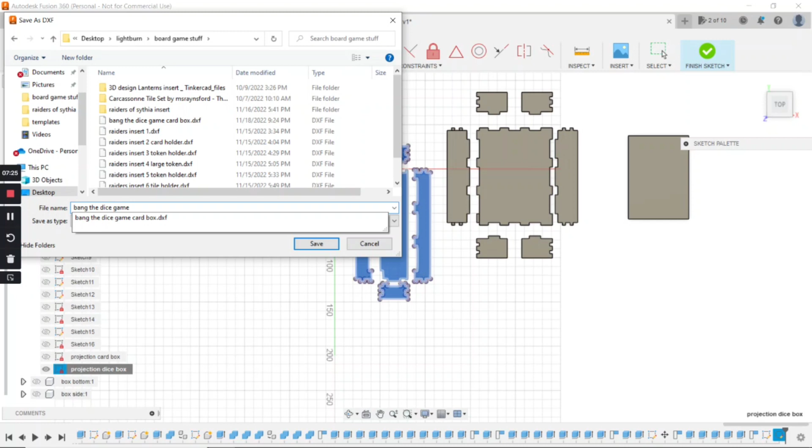And we'll go to my Lightburn folder, board game stuff, and bang the dice game dice box. Okay, and now I'm going to look at it and make sure it worked. So I'll pull up Lightburn.

We'll open new folder, maybe open. Okay, desktop, Lightburn, board game stuff. We have to do all supported. So let's go to Bang the Dice Game card box. And there's the card box.

So I need to go back and save the other one. And also I need to do a correction here because I'm missing a tab, but that's not a big deal. So we'll go back and correct that. Okay, I fixed that tab issue.

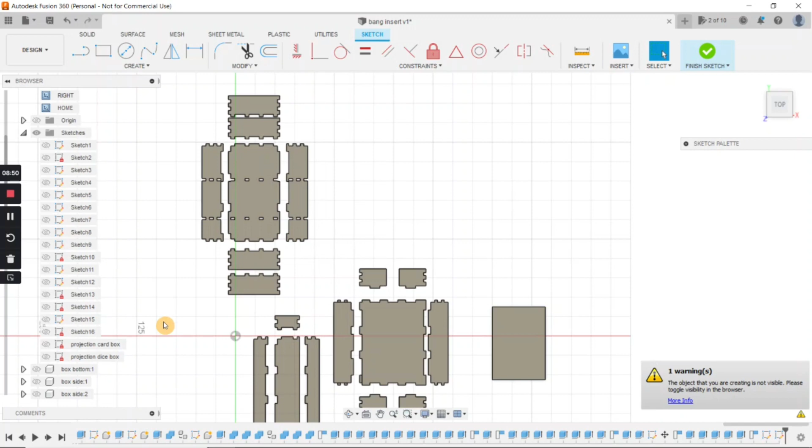And now we need to save the token box. So we will select all the components of the token box, hit OK. It's not creating another sketch. Let's try something else.

Sometimes it gets stuck in that projection mode, I think. So let me do it again. Okay, so here we go. So I have to select a plane. And now it's going to do what I want it to do.

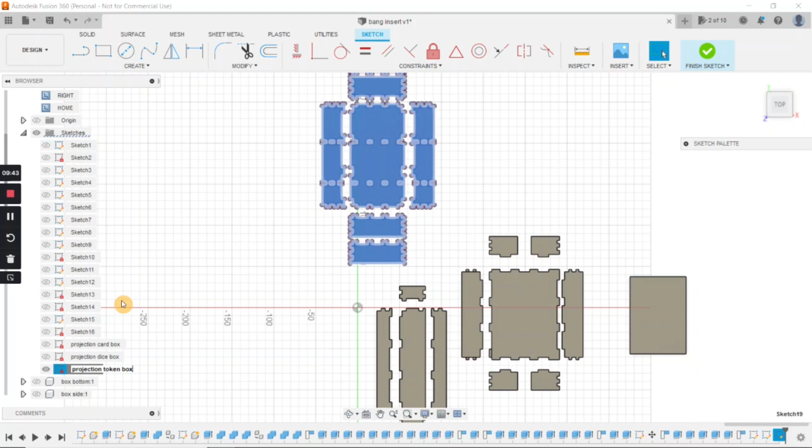So projection. Okay, we have to select our components. Okay, done that. Hit OK. There we go. And there's our sketch for that. And now we'll rename that projection token box. And then we'll save that as a DXF.

Go to desktop, Lightburn, board game stuff, bang the dice game token box. I like doing them separately because when I first started doing this, I saved them all together and I had multiple mistakes, and it's just easier to do them in separate folders. Then if I have to make corrections, it just is easier for me to do that.

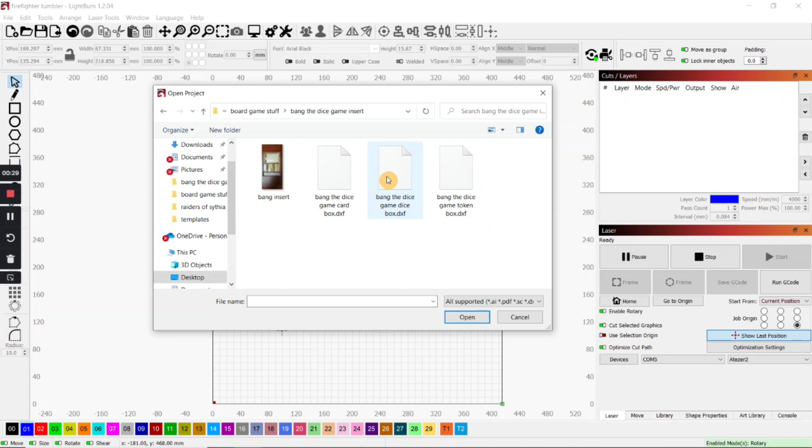And so then after this portion, we'll go to the Lightburn portion. Okay, so here we are in Lightburn. I am going to open up one of my insert files here. Let's go to Lightburn, board game stuff, and bang the dice game. Okay, so these are all saved as DXF files. So let's do dice box.

Okay, so I lost my other footage of cutting the whole insert on Lightburn, so I'm just going to repeat it here for the dice box. I had to make some corrections to the dice box, so here's the corrected version.

So what I'm going to do is, I've got my speed and power already set, and now I have to come in here and adjust my kerf offset. This is so it fits together. If the kerf is 0, it's way too loose. You have to adjust this number, and it will vary from laser to laser.

This 0.127 seemed really way too tight. I was having to use a hammer to put a lot of it together. So I'm going to drop that number quite a bit and just see how it fits together. I'm going to try 0.110 and we'll see how that works.

So we'll hit OK, and I'll turn my air assist on. We'll frame it - I have to select all of that. And I'm going to frame that, make sure it fits OK on the wood I have in here. I'm not videoing this part. And then we'll hit start and run it and cut it.

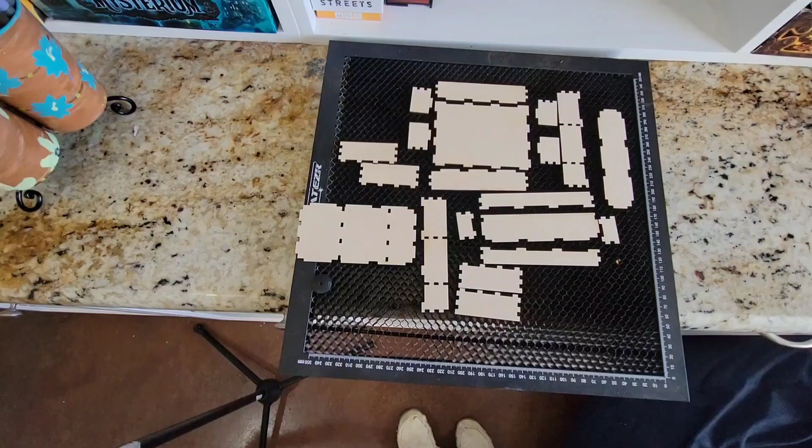Pieces cut out. Now, I had messed up on the dice box. I think when I made my cuts, I wasn't paying attention, so I had to go back and fix that. So that's the new bottom for the dice box. And now it's kind of the moment of truth, just trying to put it together.

So hopefully - this is the dice box. I'm going to move this out of the way. And let's see. Hopefully my kerf offset is about right. It feels pretty tight. There it goes.

Okay, there we go. Let's pop it in now. Sometimes it helps to have a small hammer just to tap it a bit. These joints are pretty tight, but that's okay. I could probably adjust my kerf offset slightly.

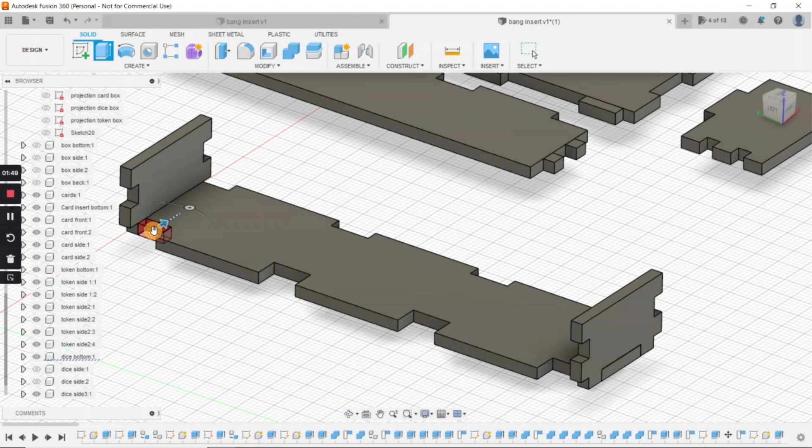We're just going to have to do this with all of them. Okay, so I fixed that. Okay, there we go, 3 millimeters. 3 millimeters. 3 millimeters. Then we'll go with these 3 millimeters. And I'm just hitting E for extrude and backing it off.

So I'm going to do that. Now I have to do it with these also, because you can see the end caps aren't going to work either. Let's see if we can do it like this. I think it'll actually work. Or, we don't have to do it evenly on both sides - just one side will be slightly different looking.

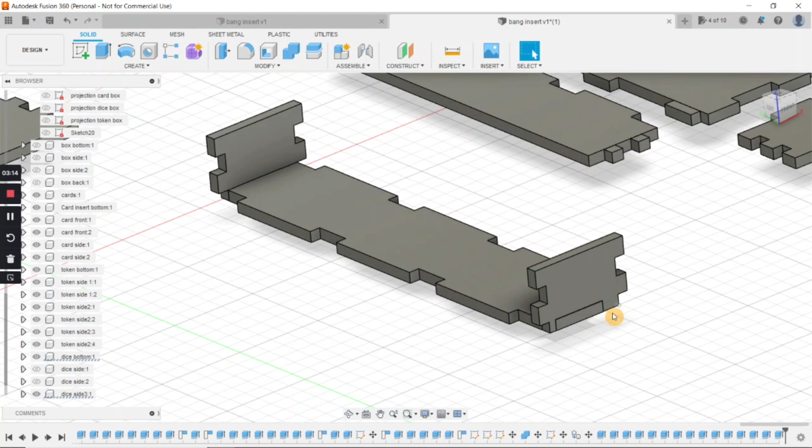I'm going to do the middle first. Okay, and one more on this side. Okay, and I'm going to pause it and do the other side. Okay, so I fixed both sides, and so when you put it together, you just have to remember one side is a little thicker than the other.

And so then we'll flatten this out and project it and recut our pieces and see how it works. And we'll get back after that.

Okay, so this is the final insert, and after fixing the dice tray, it fits really well in there now. And there's room for an expansion if I wanted to do that. So anyway, if you have any questions, I can try to answer them. Again, I'm pretty new to all this, so good luck on your own insert.